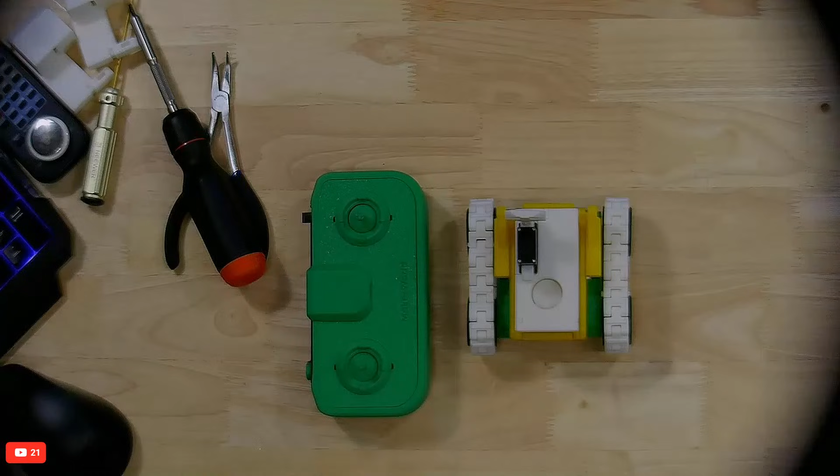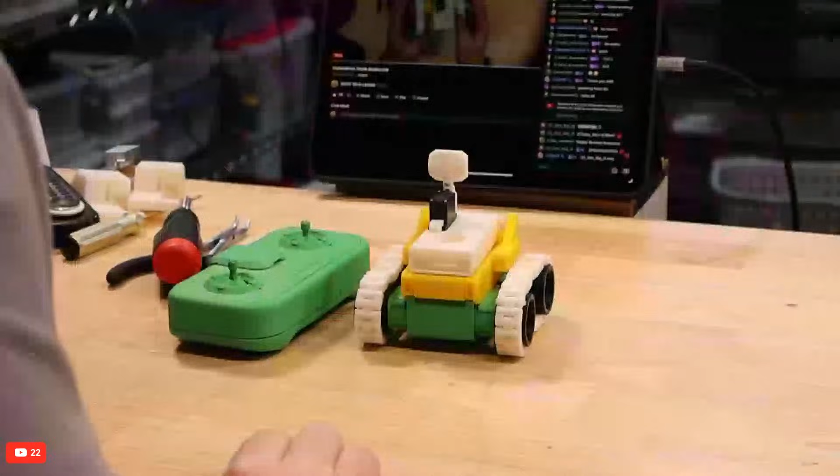One thing I learned - truth be told, since we have two to build and I didn't want to take a whole stream to do it, this week offline I built one of the tanks. The good news is that now I know what I'm doing, and if there were any complications or things I wasn't sure about, I've taken care of all that. So here it is, another view right here. We built a little tank, and we have the remote here.

Another thing I learned - if you're going to do this project, let me cut back over to here. If you're going to build one of these little tanks, which are really cool, I'll run it for you in a minute. I thought maybe TPU treads would be better than the PLA treads that I initially printed.

No, the TPU treads do not work. I put them on, and I think the reasoning is they have to actually roll quite freely. We're using relatively small motors with a certain gear ratio from the motors that run the tires. There's just not enough power when these TPU printed tracks are on there - it's jamming, it's not flowing. These tracks are so small and the tolerance is so tight that these things just aren't able to rotate the way they need to, compared to the actual PLA tracks. So that's why I printed them, tried it, and it just didn't work. We're not going to be using the TPU tracks.

I don't know what I'll do with these. For now, they'll just go down in my recycle bin, but they're no good for this build. So there's that.

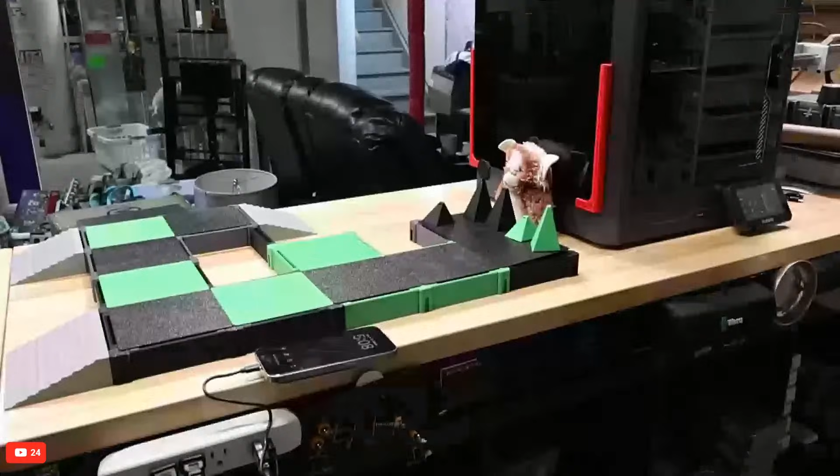I'm going to give you guys a little sneak preview of what I've been doing. Another thing I worked on over the week was I built this big beast - it's like one of those little track things that's on the CyberBrick site. I printed out a bunch of the pieces, and we can run it like a little battleground. You guys want to see how this thing works, and then we'll get into the other build? Does that sound good?

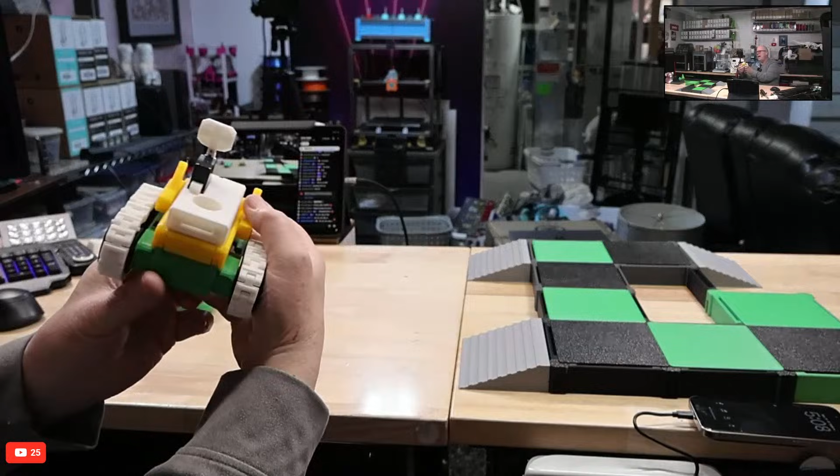Why don't we do that. So first thing we need to do is there's a power switch on the back of this - I call this the tank. Here's a little target your opponent's going to try and shoot off. So there's a power switch on the back of the tank, we power that on, and the power switch on the bottom of the remote, we power it on.

And now we can operate this little guy, make it turn in a circle. You'll notice the little gun port there, whatever you want to call it - we can raise that to shoot high, shoot low. And then we have a button here that fires the bullet, I'll show you that in a minute. But this thing is nice, it's small, it's reactive, it's pretty quick.

If we go over here and go onto the track, we can come up on here. It takes - whoa, okay, we just dropped it. It takes a little bit of practice. I hope I didn't break it. I have not done that all week. Oh my gosh, thank goodness it fell on the rug.

Oh boy, okay. Leave it to the live stream for me to do that for the very first time. Oh boy, hey hello, Kenneth Davis, aka Steve, is here. Kegel 3D, watch my words, AI is listening. Yeah, no kidding, okay, I didn't really break anything. That was funny. Okay, let's just make sure we're still operating. Yeah, we're still operating pretty good here. Fortunately, I didn't break anything. Let's try that again, shall we?

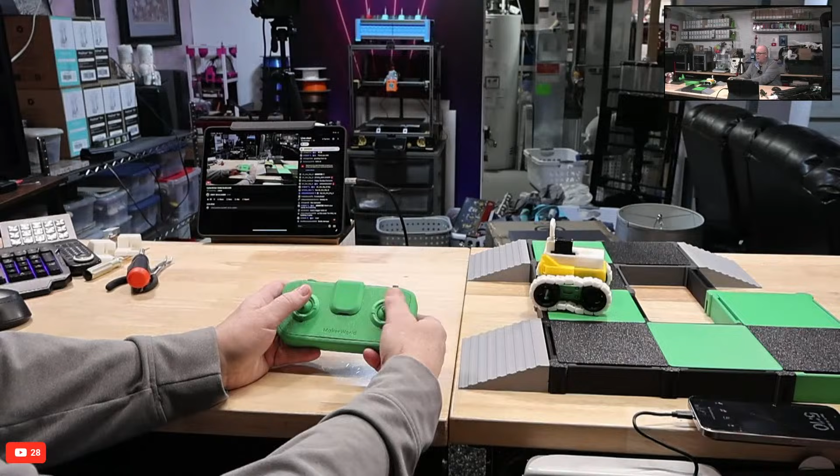So we head over towards, oh, it's just a matter of getting the steering right on this. It just takes a little bit of use. Now there's a different way that the remote can be programmed. Right now I have to do both forward, both back, and then to turn I've got to turn them opposite ways. But there's a different way this thing can be programmed so that I just go forward and back with this one and turn with this one. So I may end up changing that, but anyway.

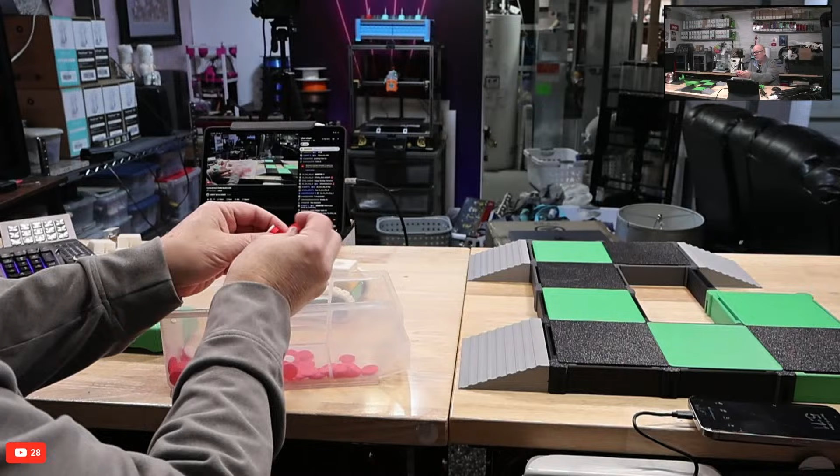Now let's load some bullets in it real quick here. I printed a whole bunch of bullets, a bunch of red bullets, battle damage. No, this is working. So right now it holds 5 at a time. So if I throw in 5 red bullets, they just load right in the top here, like so. Actually, I think I can fit 6 in there. But we got a special surprise for tonight's build.

These things shoot extremely well. So let's see if I back this up, if I can get this camera in such a view, just to show you how well this shoots. So if I raise this up, aim a little bit that way, and I'm going to shoot. Shoot. These things go pretty darn good.

You can kind of see how far these guys are firing. Oh, this one red one seems stuck. There it goes. The red ones don't seem to shoot as good as the white ones, and I think it's a little bit about the tolerance. So if I throw some white ones in here - I'm going to be picking these things up all day. Let's just load some white ones in here. These white ones seem to shoot a little bit better, I think because they weren't printed on a textured plate. So the white ones - there we go, the white ones seem to shoot a little bit better. I'll pick them all up later.

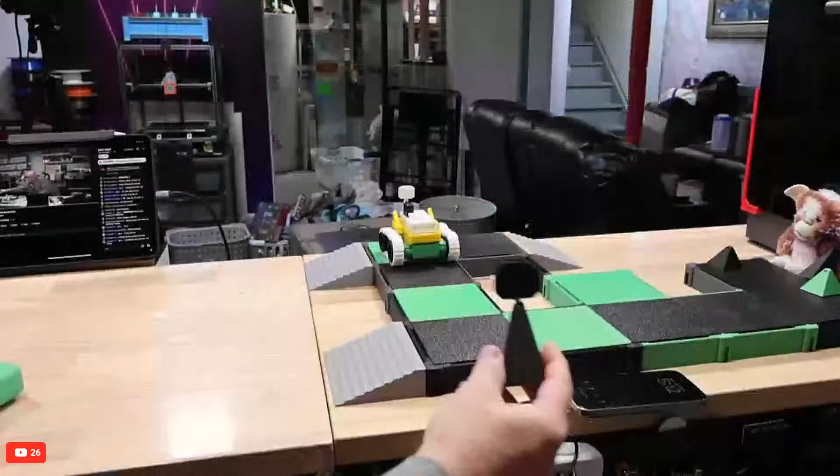There we go, there's the tank in action. And the object of this is that on the top of these tanks you've got a little bit of a magnetic target that you basically want to try and knock over or fire off of there. And then on the actual course itself you have these little towers that you can print, these guys here, and they have little targets on top too that are held on by magnets. And when you hit it with the thing, boom, you'll knock your target off. So it's like a battle thing you have between 2 players, just a fun little game. And then you can expand from all this down the road, etc. So kind of fun.

Okay, enough of that. Let's get back into the real world of the build, which is what you guys all want to see. What do you think? So I'm going to turn this off. Works really well. And they have a lot of models that you can do, a lot of CyberBrick models - they have a forklift, they have all kinds of fun stuff. Brings me back to my childhood, and I really enjoy doing this stuff.

Okay, so the next tank we're going to build, we got all the ingredients ready to go here. Okay, so let's get the build going so we can get this done.

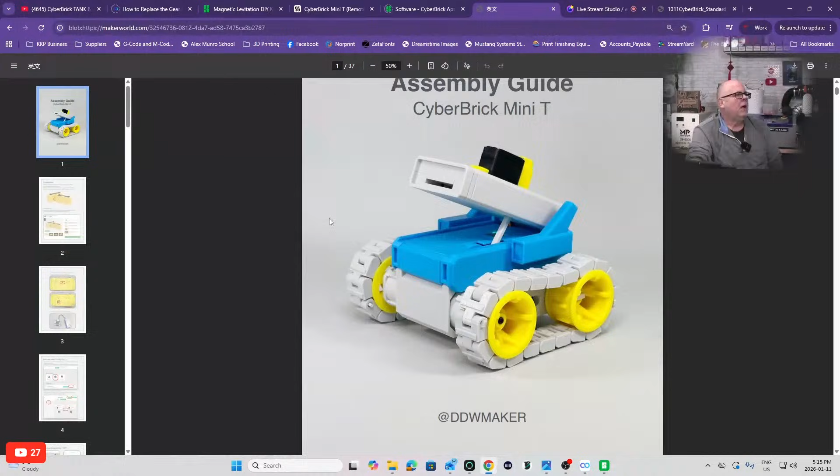Ready and go. Let me roll up my sleeves, get ready to do this build. So we're going to be following these instructions right here - this is the assembly guide for the CyberBrick Mini T.

Why am I hesitating right here? Because I'm hesitating. There we are. It is working. Okay, and we're going to follow these instructions now in preparation.

This is why we had to do the remotes first. We built the remote control first because it's required - we have to pair the remote control with the receiver in the cyber tank itself in order for it to operate. So we did do the remote controls last week. Again, we have the top one, which is the lithium battery in the top. We are not using the AA's.

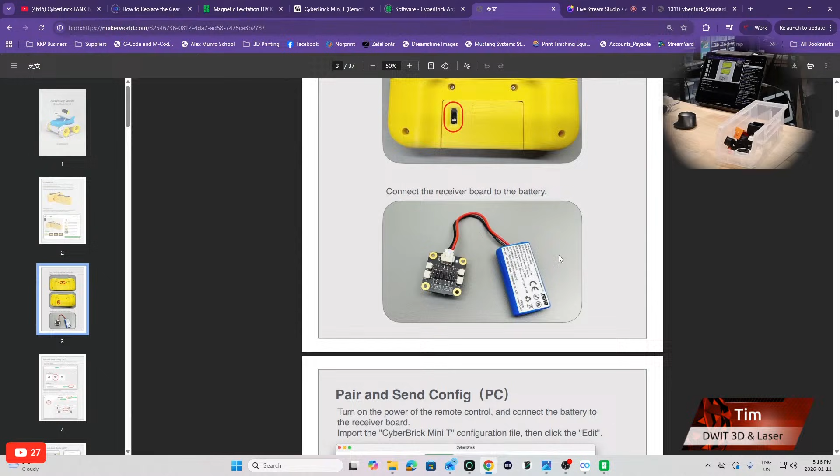Let's go ahead and get what we need to get this going. I'm going to switch over to this camera right here. Is that the right one? That is, and we're going to pull the parts out of here.

First thing we need to do is get our boards talking to one another. So I'm going to pull some parts out of here that are going to be needed for the build, as well as the board. We're just going to scatter them all along here.

Good evening, Jim. S8933. Hello, hello. I love that I have the chat right down here and I can focus on that.

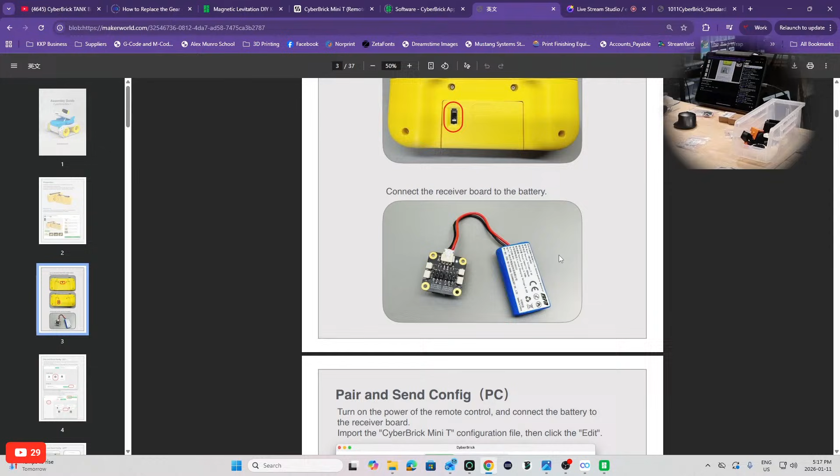I'll put myself up in the top. I'll put myself in the bottom left here so you guys can kind of see as we go along here. And I'm just going to pull all these little parts out that I know we're going to need for the build here. Okay, oh, I can switch back. Did I switch back yet? I did - no, I didn't switch back. There we are, we'll switch back over to this camera here. I think that worked, let's just see. There we are. I'm not used to having that iPad out in the front there for chat.

So there's the battery we're going to need. They also sent along the AA or AAA battery compartments for this, because it's the same plug. So you have the lithium battery and then you have your AAA battery, and they've got the same plug on it. So if you kill your lithium battery and you're in the middle of a battle or something, you can always throw some AAA batteries in there and keep your thing running.

We're going to need this little tray of screws there, and we're going to need those 2 motors. This kit came with some LEDs and some springs, which aren't used for this particular build, but this build can be taken apart and the LEDs would be used, for instance, on the forklift or something. So these are other parts to keep in mind, because there's so many different things you can build with this kit. It also came with some thread or string, not used in this particular kit either. So the first thing we're going to need is this board here.

This is the one we are going to be communicating with for the tank itself.

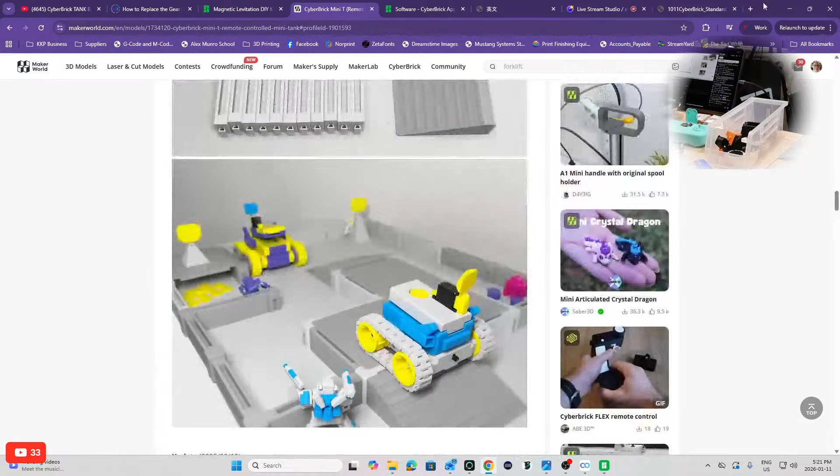And then also there's software that's got to be downloaded, which is where did I find this software? Right here, the CyberBrick app, which is what we're going to be doing. There's a link to the CyberBrick app here somewhere. I have the CyberBrick app all linked and downloaded and ready to go.

It's on here, and I don't know where it was, but it was on here. I'll find it for you, just in case anybody else is doing this. I just shouldn't skip over that. Purchase recommendations, update.

CyberBrick app, I opened it in CyberBrick desktop. Import CyberBrick desktop, download right there. So when you click on open in CyberBrick desktop, you can download the latest version of CyberBrick desktop right there, okay? So that's what I've done.

So I'll just import that into it anyways right now, like this. And it wants me to open, so I'll open CyberBrick, and that's going to open an app just like this. I'm going to be using the CyberBrick Mini T JSON file, say select. And here we go. So I'm going to move this down, go back to the instructions, show what we're doing.

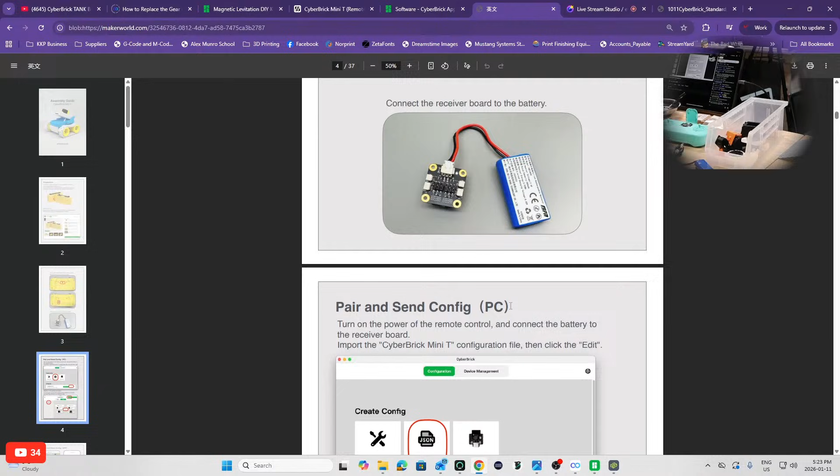We connected the battery to the receiver board. Now they want us to import the CyberBrick Mini T file and click edit, which we did. It was a little confusing because nowhere up here did it say to download the CyberBrick app, which is this guy right here. That's fine. So we turn on the power to the remote, we import that.

Click the plus to pair the core board, then drag the core to the corresponding position on the right and click pair device and send config. So all that means is that in the app here, we have to start scanning, and what it's going to do is look for those boards right now.

So it's all Bluetooth related. So what it's doing, device not found and device not found. Why it's not finding it, I don't know. It did it before, so I'm just going to say skip for now.

We're going to go plus RC module and RC module. So why isn't it finding my device? I'm going to close this app and relaunch the app and see what happens. CyberBrick. Okay, Mini T, connect hardware. And I got to make sure my other ones are off, which they are.

Bear with me one second here. RC module, confirm. Okay, so we want to make sure that our green light is flashing on the RC module. The one we're looking at - no, that's a different one. Sorry, this was very confusing to me first, and it's still confusing now. Just give me one second.

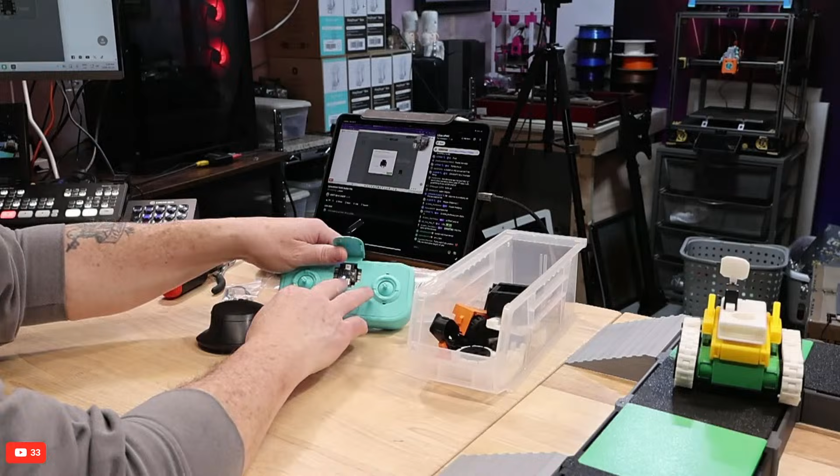This worked a little easier when I first did it, and I'm trying to figure out why. So let's just go back. Just got to be patient here, that's all. Let's just try the next step and see what happens, even though it's not blinking. It's all Bluetooth related, so.

Reset pin code - I don't think I set a pin code on this. I don't think I did. Let's just see what happens.

RC module. And let's just add these two modules. No, that's the wrong one. So I'm doing something wrong here.

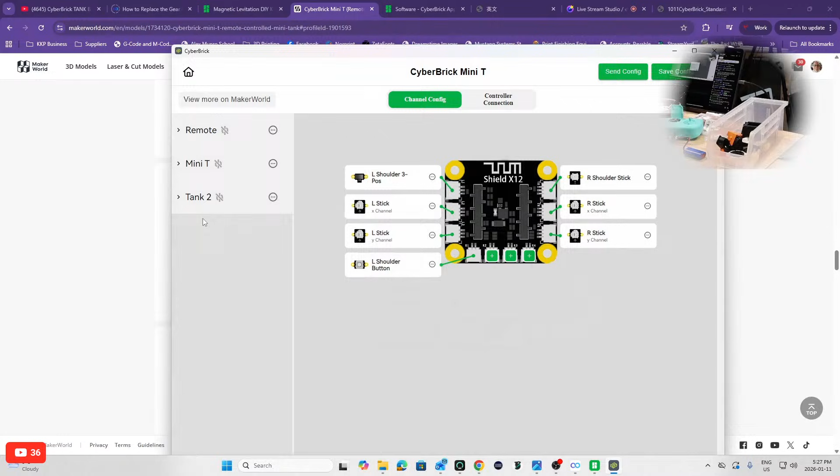Let's disconnect this, I need to drag my cores there. I need to find - let's see, it's not finding, okay, I want to add a receiver. Receiver 2, okay, so receiver 2, we're going to call this tank 2. We'll go confirm, and we're going to add a remote.

This is probably what I did wrong. Nope. Tank 2, receiver 1, so I need a transmitter. I need to use a separate transmitter. So I need to add a transmitter.

Let's see. Nope, this is not where I want to be. Not working, I do not want to be there. I need to add cores on the controller connection screen, connect them to the correct shield. That's what I'm trying to do. Yeah, I'm trying to do that.

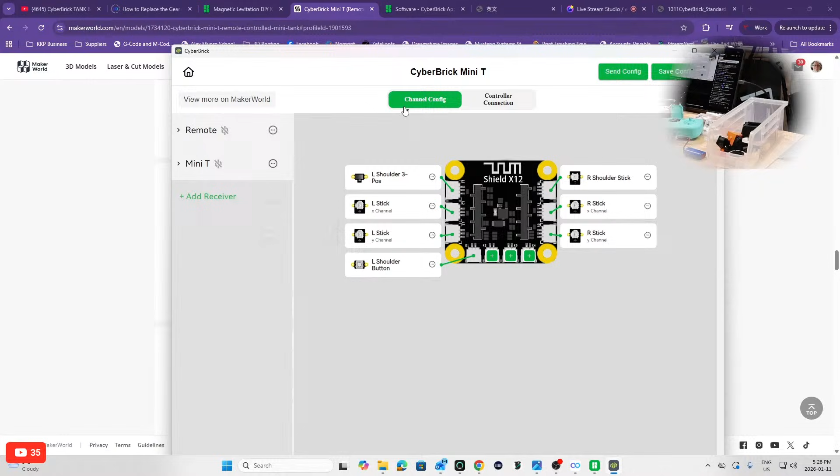Let's start over, let's go back here. Let's get rid of this guy. Let's go back to where we were and controller connection. So I want to add an RC module, but I am not getting my - there, now we're blinking green.

Okay, I was probably in the wrong spot. Now I'm getting a blinking green light on my module. Well, now it's blue. Next step. Now it was blue.

Remember an autofill next time. Please remember your PIN code. Set a PIN code, okay, I just do. We'll set the PIN code and confirm. Okay, there's our RC module.

That is the transmitter, or the receiver. So we can put this over to the receiver and confirm. Oh, now we got to upgrade. It needs an upgrade, and then we'll get the transmitter in.

That's right, remember it had to upgrade the firmware for the receiver, and now if we switch back to the camera, you'll see that it is a flashing light. That means that it is upgrading the firmware on the receiver board here. So this is doing it right.

1, 2, 3, 4, same code as your luggage. So this upgrade takes a little bit to do. So you'll see right here, it's doing the upgrade. It takes a few seconds for that upgrade to take place.

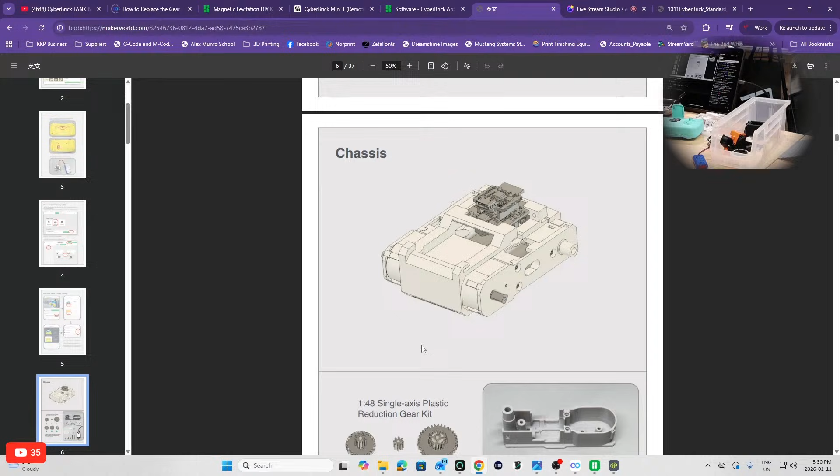So we're not wasting time watching it. You've configured about how many? Five vehicles on CyberBrick. Yeah, once you do a whole bunch, you get used to it. But thank you, Theo, I appreciate the help with that.

So we're going to go grab the parts for this, and we're just going to assemble this as we see fit. Okay, so we are going to grab the chassis and start building the chassis.

So there's one part of it there, it's orange. There's a second part of it there. Actually, I'm just going to dump all these pieces out, because we're going to need them all eventually anyways. There we go. So we need the chassis, we need the gear kits, which are the reduction gear kits, right here. And we're going to need the motors, which are right here.

I'll go back to that once that firmware is upgraded on that. But there's no sense not moving on a little bit while that's upgrading.

Okay, and we're going to need the motors. We got the screws. We're going to need the axles, which are, where did I see the axles? The axles are actually in with the reduction gear kits, which are right here. So let's go ahead and move on to the next step.

Okay, so we need to take the motors, and we're going to take our gears, and these are called single axis plastic reduction gear sets, 1 to 48. Oh, very cool. I'm going to do some more of these. I love these little kits.

So there's one reduction gear kit we're going to need here. Just going to pour that out and be careful of the parts. And then there's the second one. We're going to build the two sides, because we got to build this twice. So we're going to build both of them at the same time.

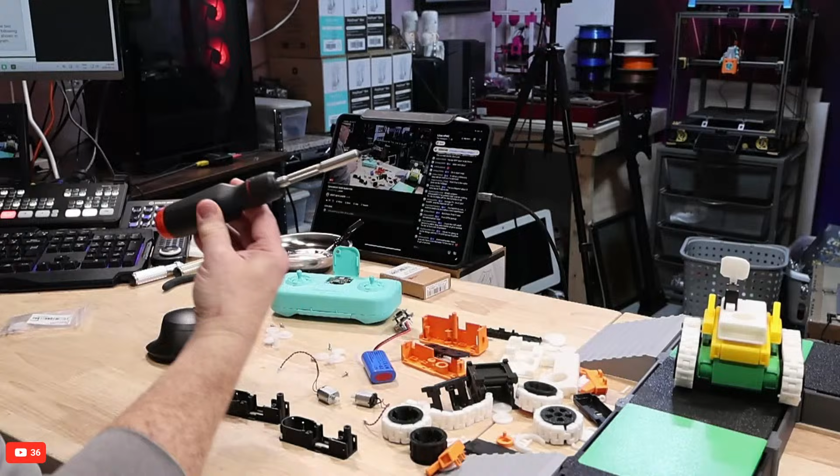1.5 millimeter hex drive and a lot of screws. I wish I had a 1.5 millimeter hex drive for this screwdriver, but I don't, so I use this guy here.

Okay, now we need to lube some gears. We're going to grab our lubricant, which we have. One of them I opened here already, that one I didn't open. This is the lubricant we're using, to lubricate the plastic gears, and we don't want to be too stingy on this, because the last thing you want is for the plastic gears to be sticking.

So the first ones are sort of an inverse little gear. This is going to be the gear that the motor hits first, so it's an odd shaped one. It's hard to explain, but the gears are actually standing vertical as opposed to horizontal on these two that are going first. So that's these two here.

So we'll get some lube on the fingers, lube the hole, and then we're going to actually just lube across the gears as well. I don't think you can use too much lube in a case like this. You just want to make sure, because you're running plastic on plastic, but this will just reduce the friction load on it. So we'll lube this one, and slide that gear in here like so.

I wonder if the overhead camera is going to be better for this. Let's just see. Yeah, let's go to this camera. There we go.

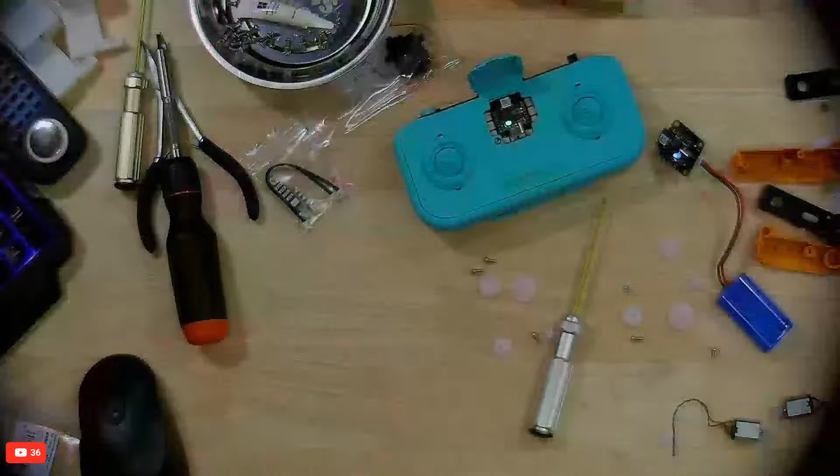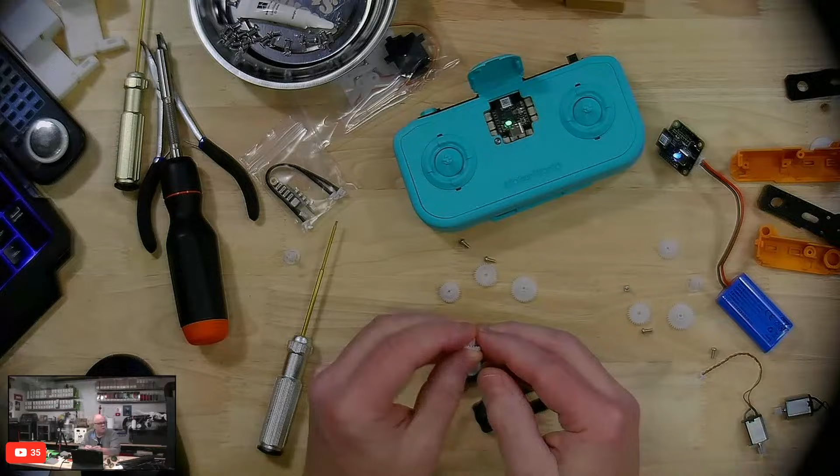So here we are, this is the piece that we're working on right now. Okay, so again, we're going to take this piece, put some lube on these gears, all over, and make sure I get some in the hole for going down the shaft. And that gear is going to go into that piece right here, like so. And I need my jeans, that's what jeans that got to hit the laundry tonight are for, right? Wiping the lube off.

Okay, now the next step is we put the motor in. So the motor goes, we kind of have to wrap the motor cable. This routes through this little hole here in the bottom.

Come on, like so. And then the motor cable itself is going to wrap around between the two colors there, and I use my little hex key here because my fingers aren't small enough to get down here, so we're just going to wind this one around this side, down the back, and like that.

So basically what they're asking in the instructions, if you look at the instructions, how they're showing you to route the wires, just like that, just like so. Okay, so we've done that. The motor sits nice and flush on the bottom there. We'll do the next motor here too.

There we go. So I don't know if that'll show up well on camera. It's hard because there's not very much light there. But you can kind of see here, maybe if I do this, you can kind of see how that wire routes. Or maybe not, that's not focusing too well. I don't know if you can see that. Yeah, anyways, here nor there.

Okay, once you actually have it in hand, you'll see.

Next steps, fat fingers going to bleed. No, they're not going to bleed, Death Cube. Ah, don't jinx me.

Here we go, so we've got those wrapped around. Now we're going to add some gears, all the gears, the reduction gear set in here. We'll do one at a time, and we've got to lube all these gears up. Let me just see.

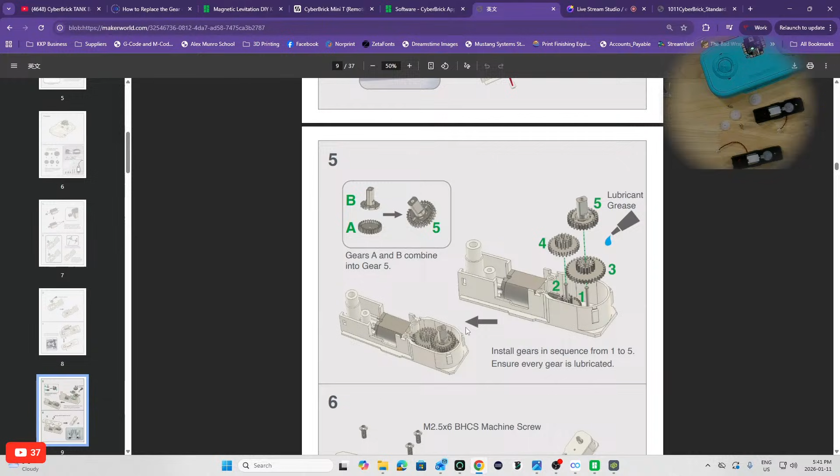So there's an order, if you look at the display here you can see the order they're showing me. Afterwards we're going to be putting the covers on. Basically we have number 1 and 2 already put in, we're putting 3, 4, and 5 in next. So number 1 is in 2, and 3 is the large one here.

We're going to get a lot of grease. I just rub the grease all around, get my fingers all greased up, and make sure I hit all the gears on this thing. I honestly don't think you can over grease these things. So there we go, that one goes on here.

Okay, we'll do the same on this side. Let's get some more grease out here. This one goes in here. You can kind of see how the gears are turning nice and smoothly. And number 4 is the other leftover guy here.

I think there's one gear on here we don't use, so I'll get some lube in the hole and around the whole thing. This goes on this left shaft. We're all adults here, we can say the word grease and shaft at the same time. There we go, and the last one.

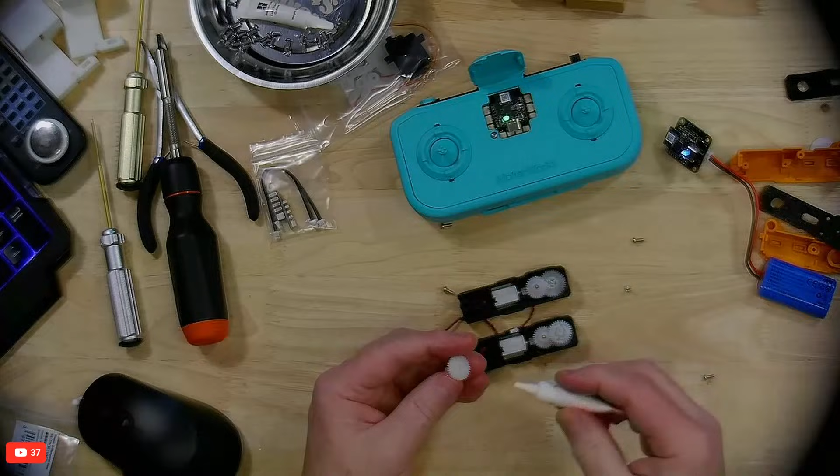These are the actual wheel drive gears that I'm putting in right now, the ones that actually drive the back wheels. Or the front wheels? No, it's the back wheels. And that one goes on like so.

There we go. Now let's clean my hands of the grease. Where's the lid for the grease? Where'd I put it? Of course I lost the lid to the grease, it's probably on the floor. I'll just set the grease down over here for now. Okay, there we go.

I'm just gonna find a rag here, give me a second as I walk over, paper towel makes a good rag. And I'm gonna quickly grab myself a drink of water, I didn't prep myself with any water for the stream. Give me a sec, just need a little swig of water. That's all I'm gonna get, that's all the water I got down here. There we go, some ice. Okay, we're good. Just need a little swig of water. Okay.

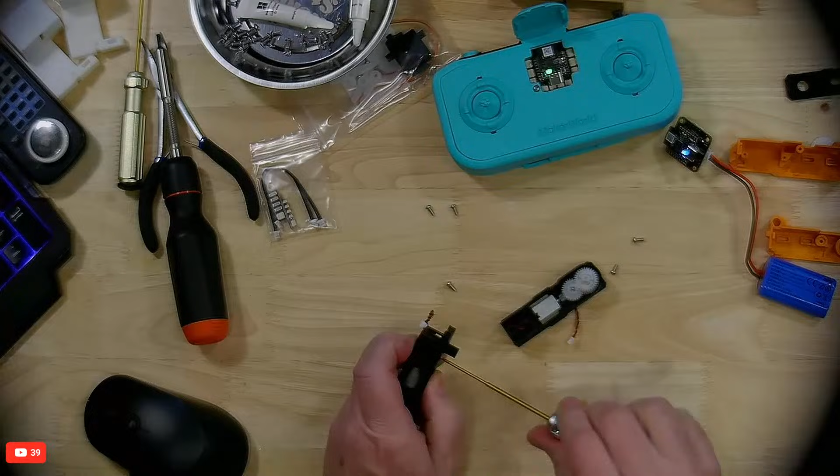These are going to be the drive gears, the motion behind the notion, the power behind the tanks, the wheels that drive us home. Thank you, Jerry, for mentioning that. Yes, the pin post at the top.

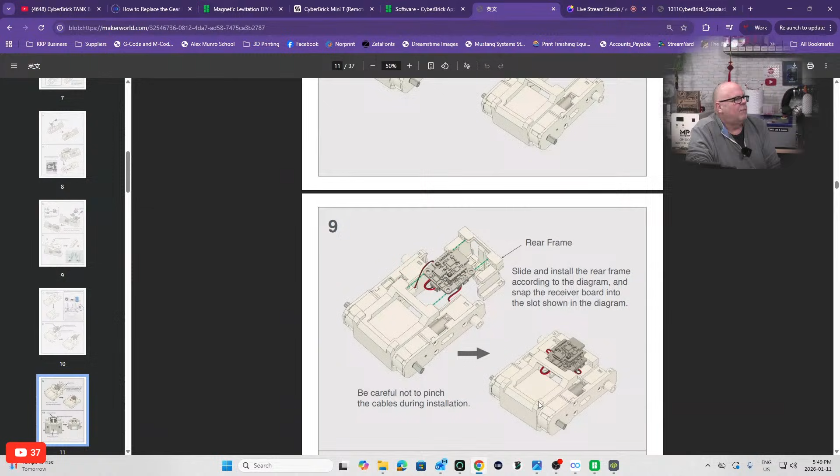Now we're going to slide the motor assembly into the frame, like so. You can see up top sort of what we're going to use for this part. Then we're going to put the receiver board into the frame, and then actually put the rear frame on and complete the whole basic assembly, making sure not to pinch the cables. So that's basically what we're looking at right here, and that would be the finished component other than the battery. Yeah okay, anyways, you kind of get the idea.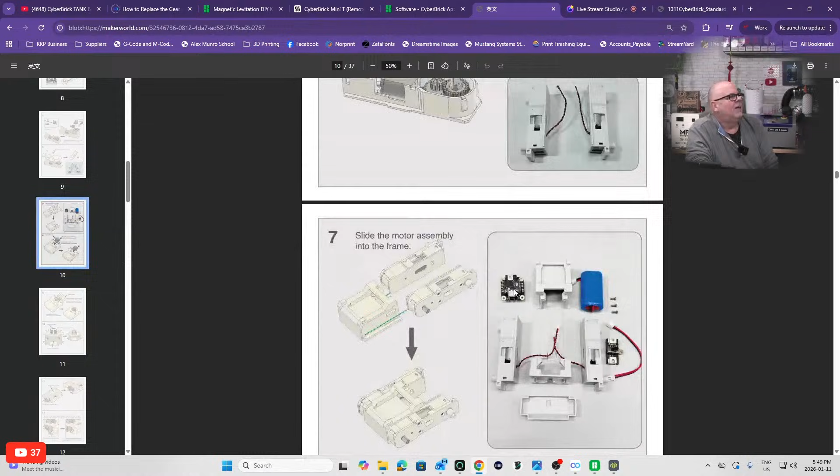Okay, so next step here is to get the frame put onto the motor assemblies. Here we go. So let's, oh no, I think this is going to be okay. So here's part of the frame, and here's the other part of the frame. We want the back frame, it's going to be this way up, and the wheel assemblies are going to go this way, and this slides into one side here like so. Let's just see if I got that right. That clicks into place, so the wires are coming out the middle, and this one slides into the side here.

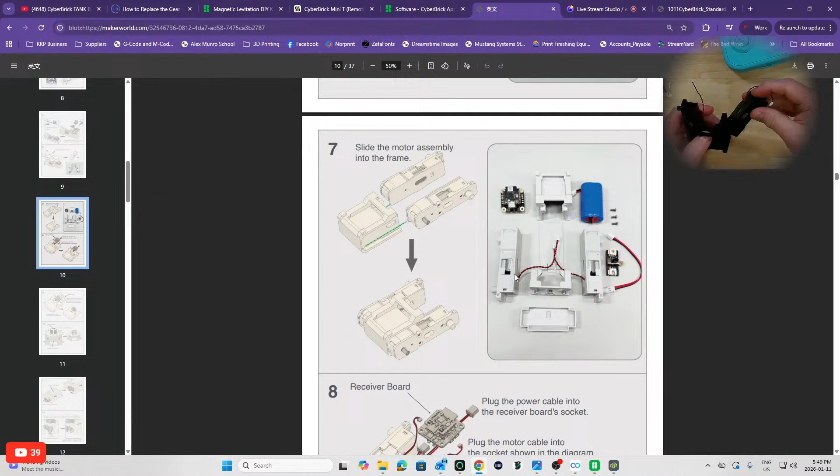It's pretty critical to have good tolerances on your printers. That slides in and clicks into place like that. Okay, then we take the receiver board. Oh, the receiver, oh right, the board. Okay, let's back up a step before we've completely messed this up.

We're going to back up one step and make sure that the... oh, I didn't even switch the camera there. I'm sorry guys, but let's back up a step here.

So we're going to go back to here, and we'll see that the update was done. It was up to date, so we can close that. Now we have to add the other core, so we're going to add the other RC module, confirm, and that is the remote, which is blinking green. We go next.

Okay, there we go, and then we enter our pin on this one again. I'll just use the same pin I used for that other one. Confirm. Okay, then we drag this onto here, and it's going to do an update as well. Confirm. And what that's going to do is update the transmitter board, and again that's going to take a little while to do, so we'll continue on with the build while we do that.

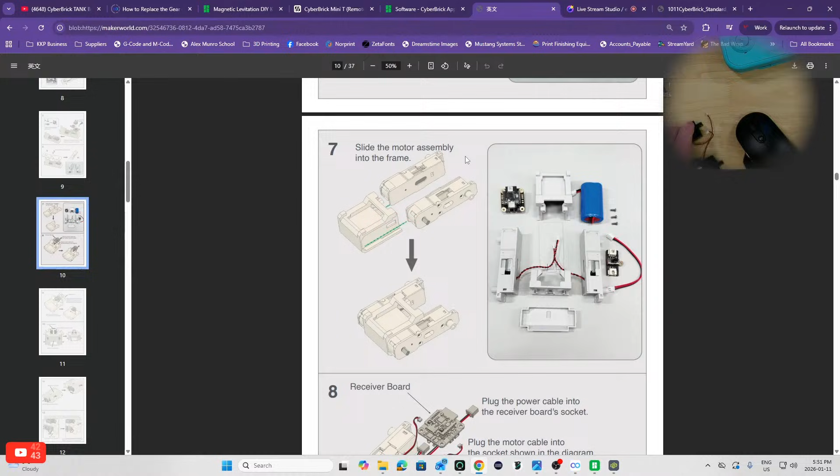Okay, so let's continue on with the build, because now that the receiver... did I switch back? I didn't. Now that the receiver is updated, we have a solid blue light. I can actually unplug the battery from it, and we can work on installing the receiver now.

Okay, so this goes with the... well first thing I need to do on this, let's see. Yeah, I need to plug the battery cable, the power cable into it, which is... where did I see that other bag with the power cable in it? There's one cable I'm missing, I'm just looking for it here. It's not the battery cable itself, it's another power cable. I believe it's not the servo motor, it's the power switch module. Here we go, this is the other piece that I need, right there.

Okay, so in this we have our actual power switch and our power cable. This power cable is going to plug into this piece here, like so, without bending wires. There, that plugged in. Okay, and then that, now this module...

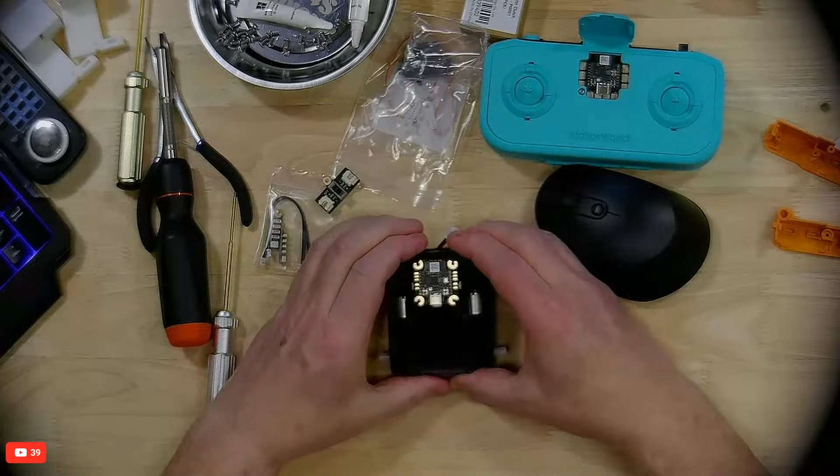And come on... like that, there we go. So that's going to hold. There's no screws holding that module in. It's just the back cover piece that's holding the module in, just like so. So there we go.

I just lost my instructions. Did my window crash? No, there it is. So that's how we're looking right here.

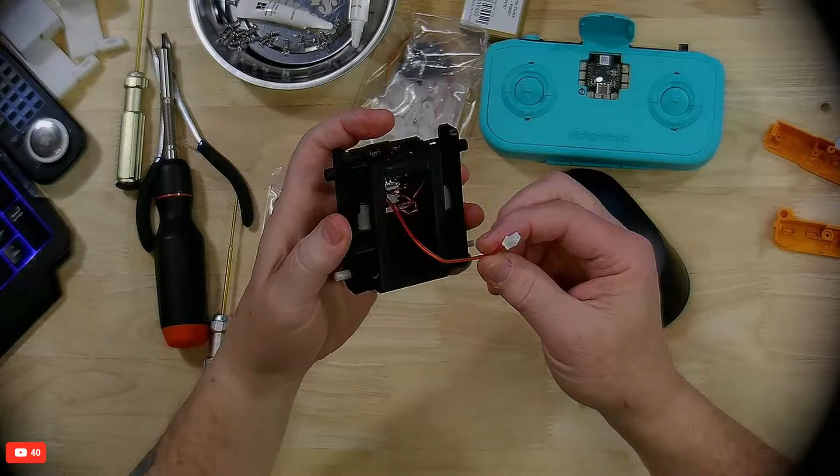So yeah, this is going into the back battery compartment. This will eventually plug into the switch, which we're going to put here. So there we are at this point.

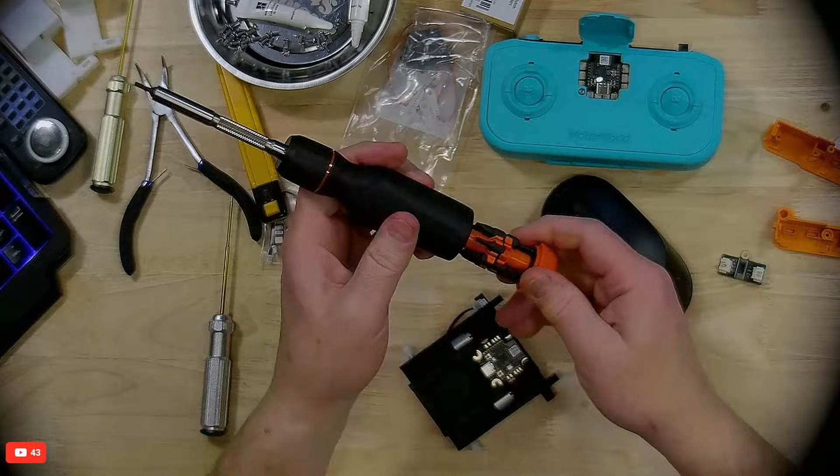Shoot. Okay, I'm just gonna need to... didn't do that the last time. See, I'm showing off and I'm going too fast, trying to go too fast. I just got to separate that one piece down there. I need a tiny flat screwdriver to separate that. I pinched one of the little wires, and that was a no-no. Okay, let me just see if I can get that out of there.

They're just so delicate, I don't want to break a wire. Come on.

That's why I did a practice run, so I didn't have to put up with this stuff. And this back piece does not come off too easily. I would think that if you wanted to disassemble one of these to make something else, you're going to end up breaking a couple pieces. Bear with me, I got this wire really stuck in here.

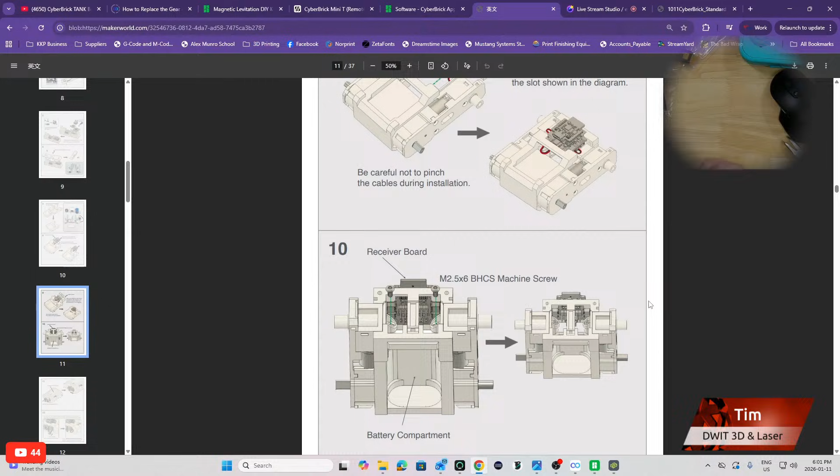There we go. No reprint happening. Okay, we got those two screws in there. It's hard to see on this. I got a crappy overhead camera, but there's two screws inside there holding that on.

This is our battery compartment in here with all these wires in here, which is fine. So now we're going to put the power switch part on. There's only one way this goes. There's a hole here for that to screw in. That sits in there just like that.

Another little screw right there. Just like that, there's our switch. And then we run the battery cable up. So with this looking this way.

Oh, I thought the battery went on the other side. No, we're good. So the battery cable comes up through this hole. Come on, get in there. Just like that. And then you have to manipulate and maneuver and plug this in here. And with big fingers, it's not easy, but it's doable.

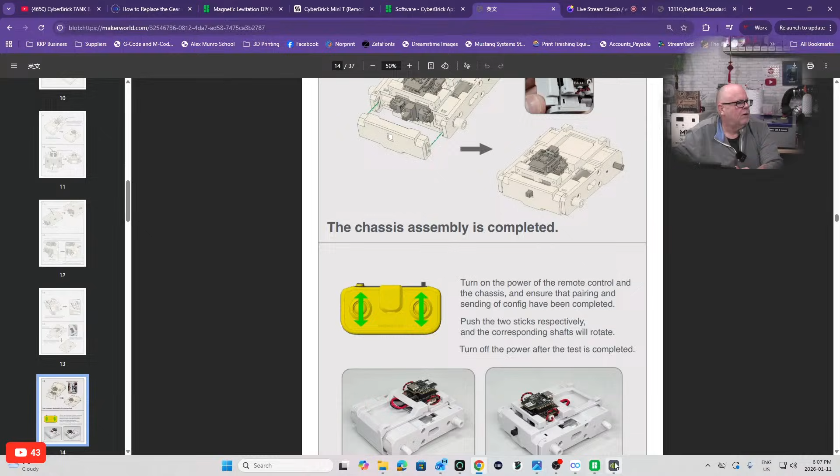So if I can test this now by having both of these on, and once we get solid lights, and we have blue, we're still flashing, it's maybe still pairing. There we are, blue and blue. We're still not paired, I guess. Let's just see what's going on here.

Oh, one step I forgot. As you see, I had to hit send config. There was a button up top that said send config. I didn't send the configuration. Now you'll see that we have flashing blue lights, flashing blue, a solid blue, and these are going to be paired in a second here.

There we go. So now if I push the right button on the remote, you'll see this one is turning. Left button on the remote, this one is turning. So we've paired things properly.

Now we've got a little bit of drag, motor run on, whatever you call it. In other words, we are not perfectly - I don't even know what you call it. See, this one's moving on its own a bit here, but we can fix that in software a little bit later. It just means that this one's not quite parking, I guess, if you want to call it that. I forget the name for it, but we'll fix that in the software later. So let's for now just shut off the remote and shut off this, and we'll move on with the rest of the build.

Okay, yeah, the Theo 3000, send config. And you know what, I had that same issue with the first one. I think, why isn't it working? And then I read the instructions, it says yeah, you got to send the configuration. So,

Jerry, you sold your sister's truck to a guy in Canada. He's flying down in 2 weeks. Oh, cool. Zero at the joystick, yeah yeah.

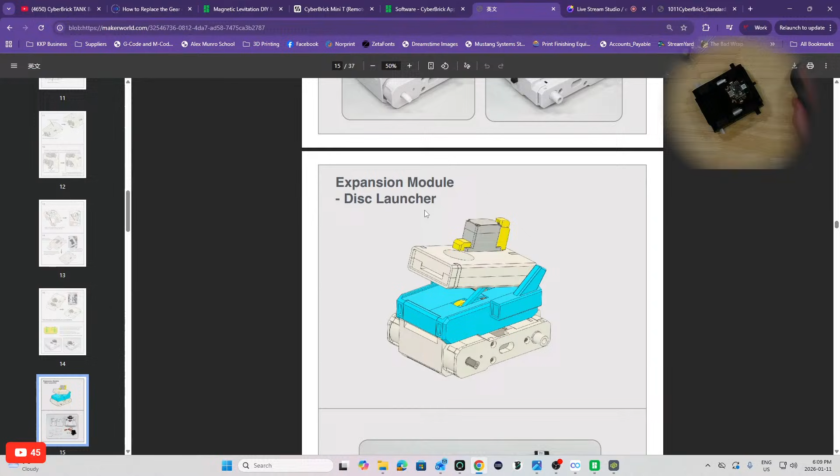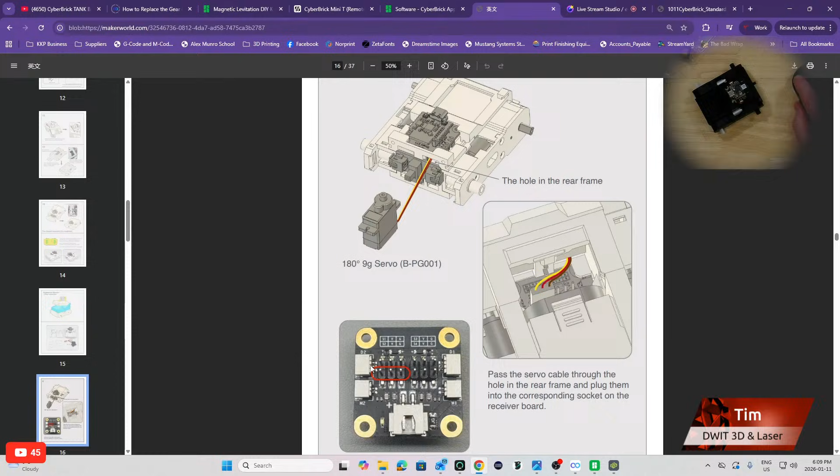So it's working. Now we're going to work on the expansion module disc launcher. Yay, finally we get something fun going on here. So the first thing we're going to do is we're going to put our 180 degree 9G servo and plug it in the hole, and we're going to plug it onto the spot where it says right there. Easier said than done, trust me, because I have big fingers again.

So let's go ahead and cut back to this, and we'll go back to this and cut back to this. So the servo I want is the 180 9G servo, and that's the 360 9G. I don't want that one, I want the 180, which I believe is this one.

Sun to the rescue, there you go. Yeah, no, he won't be coming down to do this anytime soon.

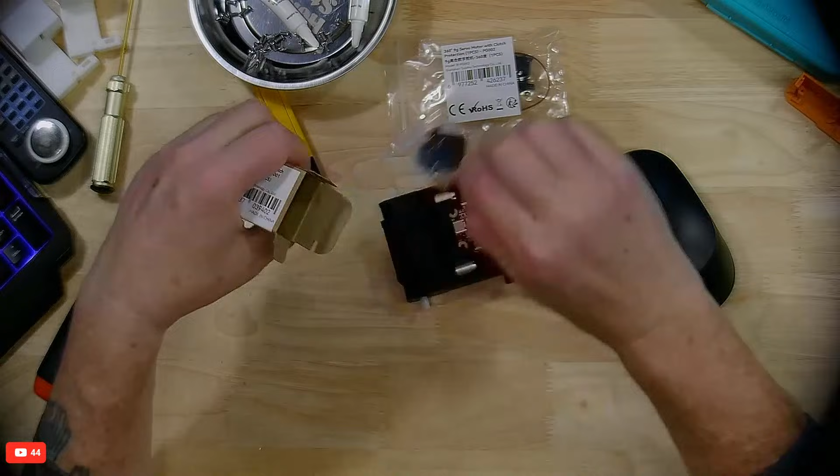So there's our servo with our pieces we're going to need. Let's open this servo. I have tons of servos, by the way. I don't know if I have these particular ones, though, but that's okay. These servo wires are a bit long, but they could be shorter, but they're fine now. We're okay for now, see they're a little longer than they need to be, but they do what they do. Okay, so we pop this front part off here again.

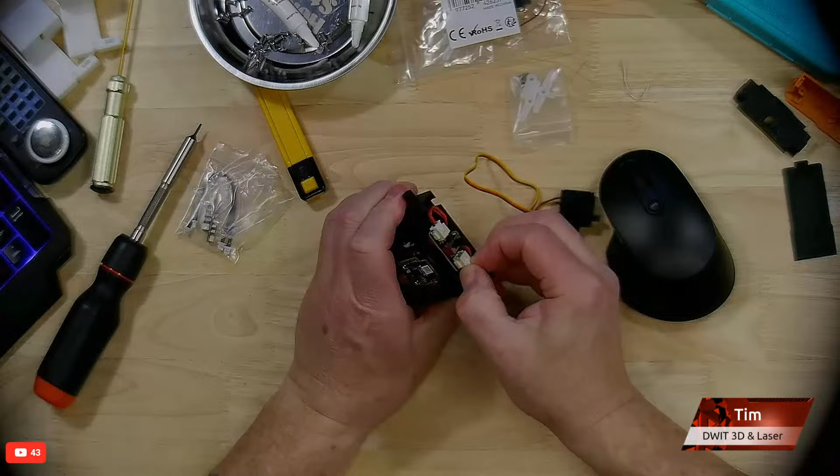And now we also need to get into the battery compartment again, which is why I took it off and left it off last time. Aha, so we open the battery compartment. We're just going to unhook the battery for now. Come on. Actually, I'll just take the battery out for now. Come on, get out of there.

There it is, okay. Because we've got to get at these pins to hook the servos up inside here.

I am going to cheat because I learned in advance. We're going to be plugging both servos in. If I plug the first servo in where they say to go, I have trouble reaching into where the second servo's got to go in here. So I am going to, that's not very bright.

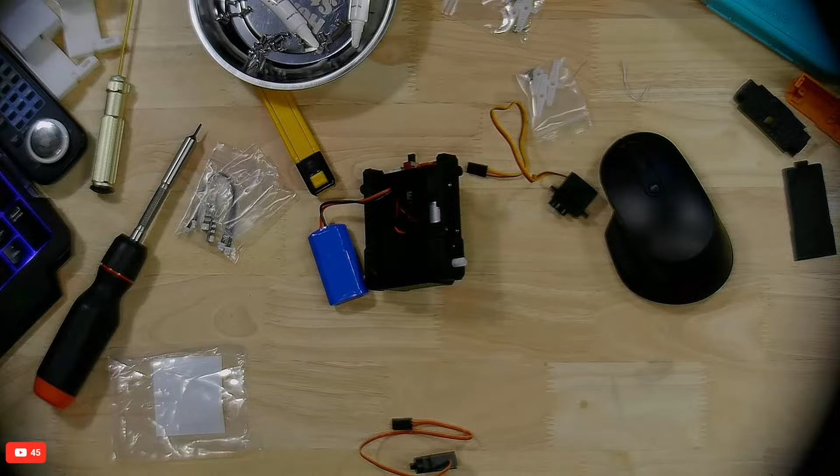I want to get a little bit more light on this for you guys so you can actually see inside. This might work here, just so you can see how tight these pins are and why I'm doing what I'm doing. See if this will make a difference. This might help.

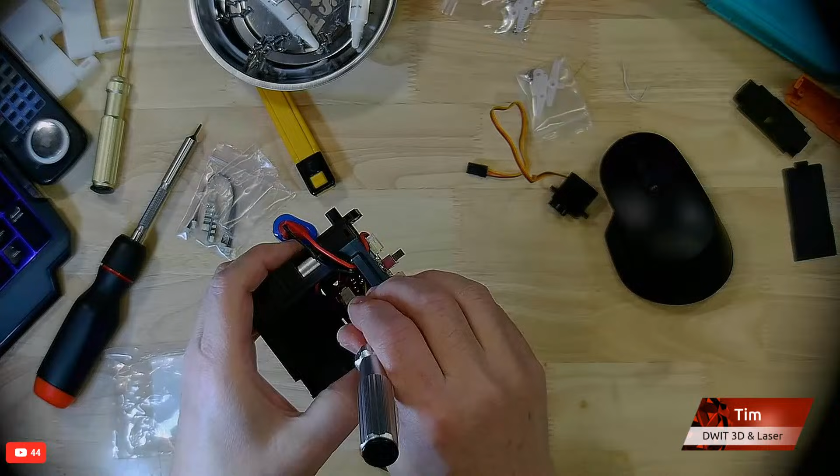So inside where the servo pins go is right, you can kind of see. I'm trying to find, right in here, the servo pins kind of go right inside here, and they're kind of hard to reach. So just want to make sure.

So instead of putting this one in first, I'm going to put the 360 degree servo in, the other side where it's going to go, and plug it in first. I'm basically going to skip the one step and get this plugged in first because I ended up having to unplug the other one to get this one plugged in.

So this one's going to go with the brown wire towards the middle. So this is going on the first set of pins. And I had to really, it's so hard to get my fingers in here, but I'm going to do my best here without swearing to get this on the first set. It's not easy. I think I actually cheated and used tweezers before too, because I can't get my fingers down in there.

Okay, here we go. Let's get this one down and on those 3 pins. There we go. Okay, first one's in, and now I can put the second one in because the pins for the second one are actually on this side of the servo, like towards my hand here. So it's going to be easier to put these in without that first one.

Okay, so let's grab that. Let's grab the plug. There we go. And then we will get this one plugged in. And there we go, that's much easier. Last time it took me forever, I struggled forever with that second servo because I was trying to get it in behind the first one, and yeah, it just wouldn't work so well for me.

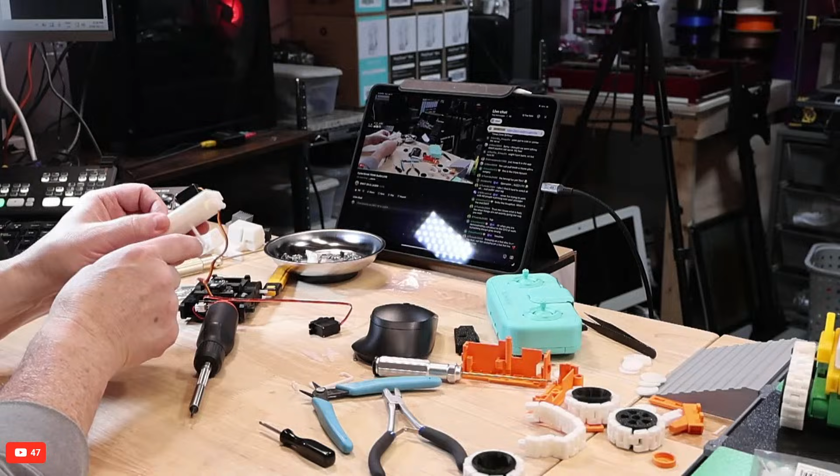Then this sits in that little hole in there, and then this comes on just like, there we go. And that's the piece that I wanted right there that I had to have sticking out right there, that little piece right there. Okay, now I can put these back on, like that. Well, that wasn't so hard to take apart. That's good to know.

You can close your eyes, you won't peek. There you go, and there we go. Now it's back together with that piece that I totally forgot. Okay.

And press and hold the left button to launch the disk. We already did that, that's good, that's good. Now, there we go. And we're all set for the next step. Okay.

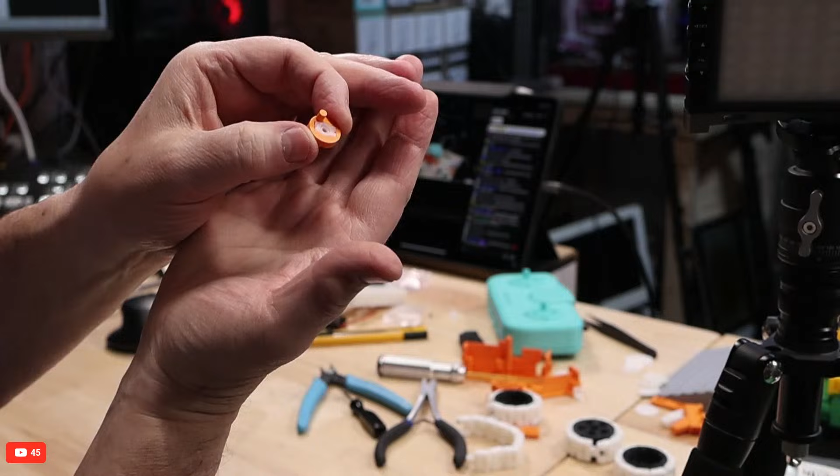I took that light away, didn't I? I think that light was helping things here. Yeah, I think that's helping things a bit.

Then this piece goes in like so, through that hole, like that. So this is that final piece right there. Okay, that's going to go on this servo, if I'm not mistaken.

Oh, first of all, I got to mount the servo in. Let's see, we want the one with the long piece here. This servo mounts in this way, like so. So we have the wire underneath, so this servo sits in here like this.

We're going to grab our little screws out of the servo bag. Here we go. Okay, and we're going to screw this little servo into place. Why are you not sitting down there properly? There you go. Oops. Come on, there, that's better. Okay, so we'll screw this in here.

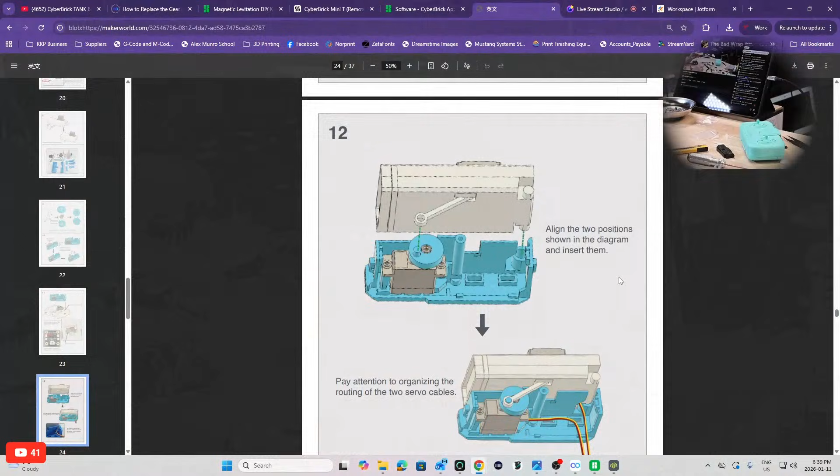Pay attention to the organizing and routing of the two servo cables. We're routing the same way as the pictures. We're looking at part 12 here, making sure the servo cables come down through the proper slot. We're going to assemble all of this, paying attention to the wires and making sure they're flat and not being pinched.

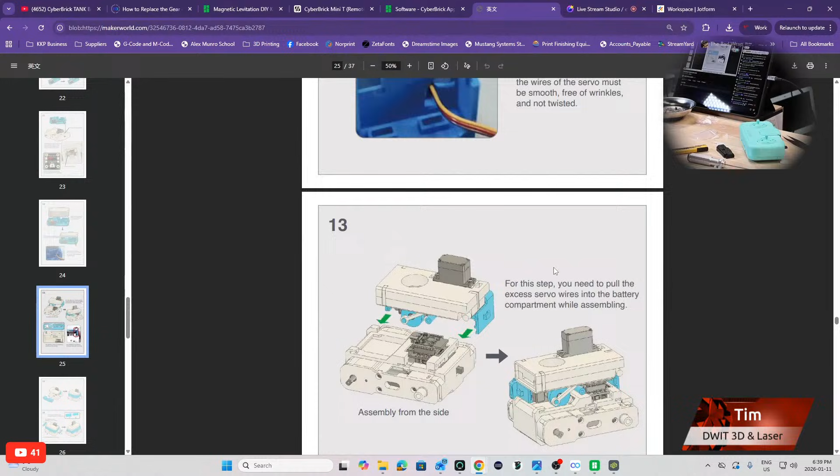Okay, so this is the stage we're at right now. We are coming out the right way for the servo wire here, and then we're going to slide half of this.

Now, are the wires going to be tucked in? I don't remember if these wires get tucked in yet, but this half slides onto the tank. We got to make sure this doesn't come off of there. There we go, just like that, make sure it stays on.

This slides onto this half of the tank, like so, just like that. And these wires, let's make sure I'm not pinching wires, and I'm not. Okay, like that.

And we're routing... why is it showing a wire coming down through there? I guess they want this wire, that's the wire they're talking about. Pay attention to the state of the servo wires after assembly.

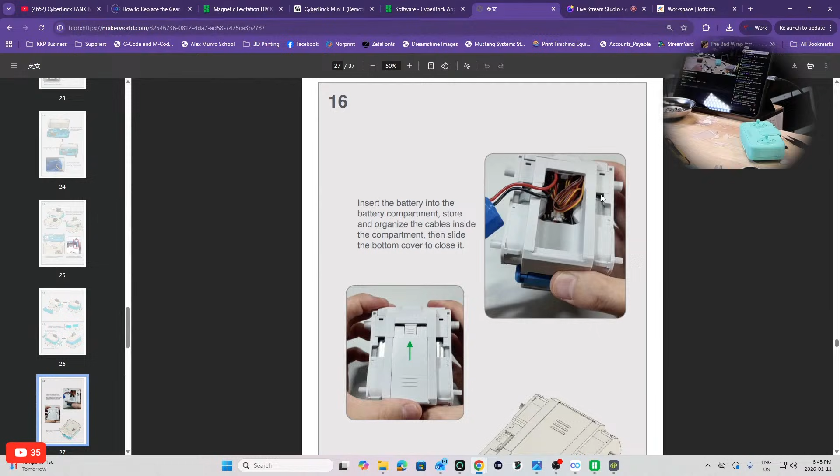Look at that, did I forget anything? No. They look at how neat they make the wiring look in the back here in the picture. Like, it's that easy, right? I guess if you took your time, it could be. I'm sure it could be.

Anyways, now we're going to put some fins on. Okay, so these little fins here, they just have little plastic bits that snap in. These are more, I think, just racing fins I guess if you want to call it. This snaps in, try not to break it. There we go, they snap in, and yeah, if you're going to disassemble it, you're probably going to break these things, but we'll find out because I'm going to be disassembling the other one to put the multi-shooter in.

And then this one snaps into the side. So there's basically holes right on the side here that match up with these holes, or slots, pins, whatever. And then you just snap that in like so.

I still have to put magnets in that one. Now I think it's the tracks - now that we're at this stage. Oh, actually, they want us to test the launcher first.

So we'll power that on, power the remote on. Now this little handle, you push it up to raise the launcher, down to lower it. You can hold it and it'll continuously go. That works good - we're all set.

It's better if they're loose. Yeah, don't do it, no, I'm not going to tighten them. Okay, so if I go into, see, I can still hear the motor running in here, and I shouldn't.

But what I did last time, and again, this is me not knowing much, is I went into channel config, into the remote, and I'm trying to remember where I found it. I believe it was the 3 position, no, it was the left stick. And there's somewhere where I sort of adjusted the parameter settings. No, it automatically does an adjustment, and I'm just going to try and find it.

Right stick, this is where you do adjust things and everything, right? And I'm trying to remember where I found it. Remote, edit, auto sleep, no we don't want to do that. That's fine, we can auto sleep, that's fine, just because it's going to put the remote to sleep.

But where did I find it, was it in the mini tank? Motor 2, motor 1, servo, continuous servo, LED. Oh, I'm trying to find where I found it. There's a way where I can do an automatic adjustment where it adjusts everything and centers everything. Let me see if I can figure this out.

Controller connection. Well, maybe because I got to reconnect them to the software. Let's connect them while they're on. Let's just have a look. Okay, so the devices are already paired.

Once they're connected, I should be able to find what I was looking for. Is it in here, recognize? No, I think it was under config. There we are, we have the green. It was, let's see, edit.

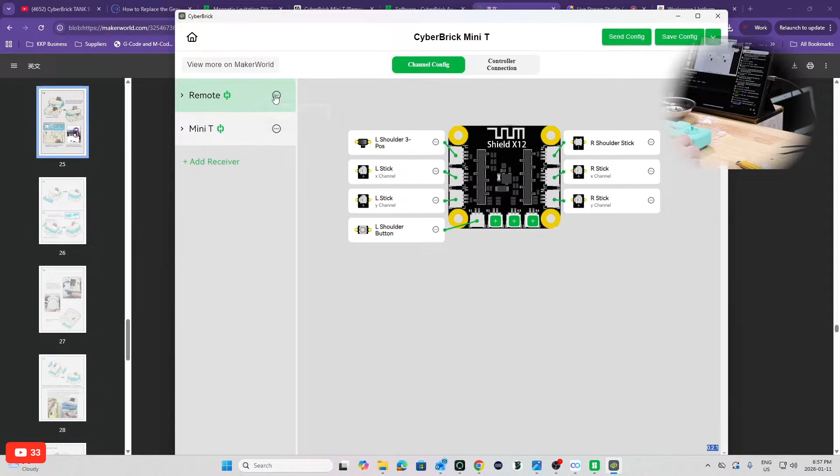No. Left stick, mini T, where was it? Where was parameter settings? Auto trim, that's what it was, start. So we're auto trimming. Calibration complete, detected midpoint, calibrated. And then close, and then I believe the right stick, parameter settings, auto trim, start.

Calibrated, close, and then we go to the tank, continuous servo, angular servo, motor, code. No, there's a lot of stuff in here I don't understand. See, I'm still getting that little bit of a buzzing in it, and I don't understand why.

Oh, send config. Oh, yes, yes, yes. So we auto trim, let's send config. Thanks, Theo. Okay. So we did the send config. And it's going to reset these.

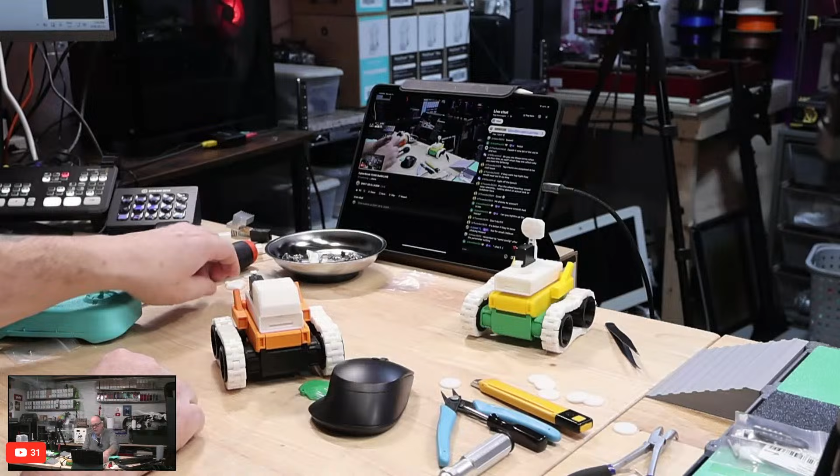Ethan asked me, did the tanks blow up? I said, no. No. So there we are.

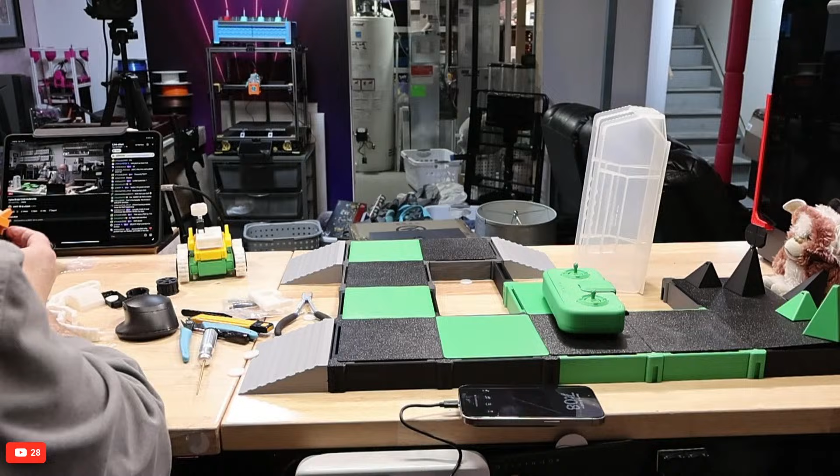These two parts got to come off on the side in order to get that screw out of the side. Let's just see, that comes out real easy actually without breaking. And then, yeah.

And this back piece, let's just see if I can snap this back piece off. I wanted to see how easy it was. That back piece comes off, snaps off. This side piece comes off easily, because I forgot to put a screw in there. And then there we go, we're all apart and ready to go.

So the other one will come apart just as easy for me to switch that top out. And nothing is broken, here, there we go, nothing is actually snapped. The plastic survived, so this thing can survive a fall. Look at that.

Look at that. It did remind me, though, that I forgot to put the little screw in the side there to hold it together. That's probably why it broke, because I forgot that screw. In this one it's the yellow one. It holds this whole piece together, because that's where it came apart, right where that screw would have held it all together.

No toys were harmed in the making of this stream. That is so, so true, Tuxedo. So it's built like a tank, yep. Phone will be the next thing.